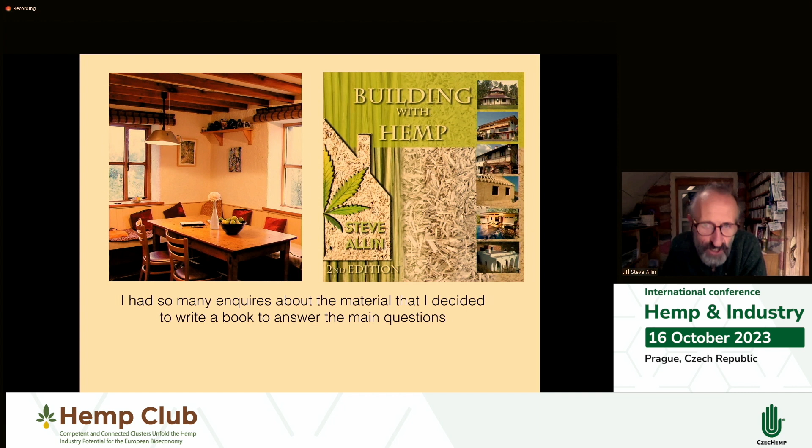This also led on to me being in contact with other groups who were interested in promoting alternative ideas, and a lot of those people were connected to permaculture.

Permaculture was an idea that originated after the first oil problem around 1972. Funny how a lot of things all started around that time. That was when we had the first oil crisis, and when it had been predicted that the US would reach its peak of oil production, something the oil industry was absolutely horrified by. They tried to discredit the scientist who came up with those ideas, a guy called King Hubbert, and dismiss the whole concept as ridiculous.

However, some years later, a group of oil geologists from around the world attempted to do the same calculation for the whole planet rather than just the American industry. They realized that around the middle of the 2000s we would be heading into a similar situation. This inspired some students studying permaculture on a course in Kinsale, in County Cork in southwest Ireland, the very first accredited permaculture course, to invite me to teach them about hemp building. They then realized, having amassed all this information about the impending doom of oil becoming more expensive, and climate change as a result of oil use, that this was going to have dramatic implications for humanity.

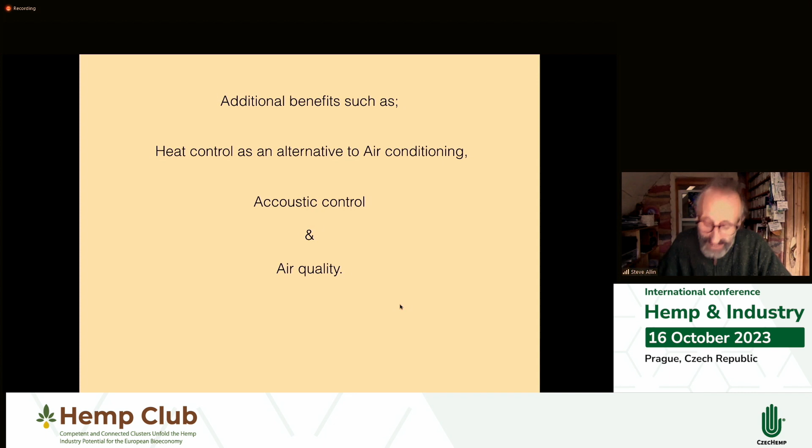Hello, everyone. My name is Paolo Ronchetti. I've been involved with hemp building since 2006, first as a postgraduate student and a researcher, and then as an entrepreneur, and now as a manager.

In 2011, I started up a company called Equilibrium, with the aim of introducing hempcrete construction in Italy. At the time, we had no hemp building in Italy. And since the beginning, my aim was to bring hempcrete to the industrial scale, because according to me, that was the only way to bring this technology to the stage that it deserves to be.

In 2018, we joined Senini, which is an industrial player in the north of Italy. It is a large company with 5 plants. One of them is totally dedicated to hempcrete construction. We didn't invest into a new plant; we actually retrofitted an existing plant for making concrete blocks into a hempcrete blocks plant. The company's core business is concrete products, mainly floors and blocks.

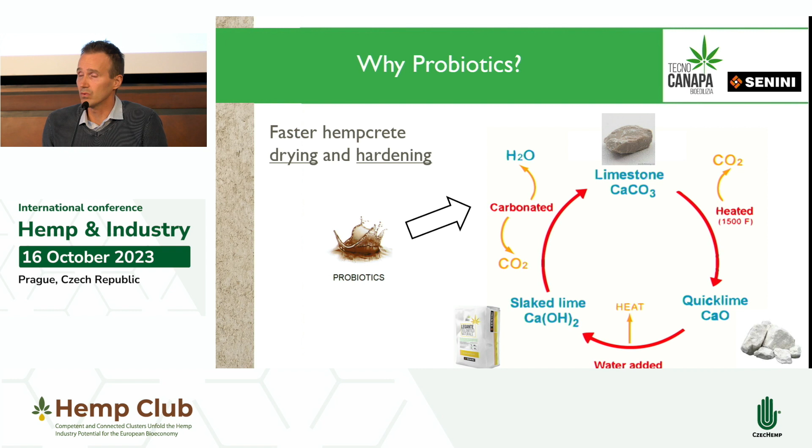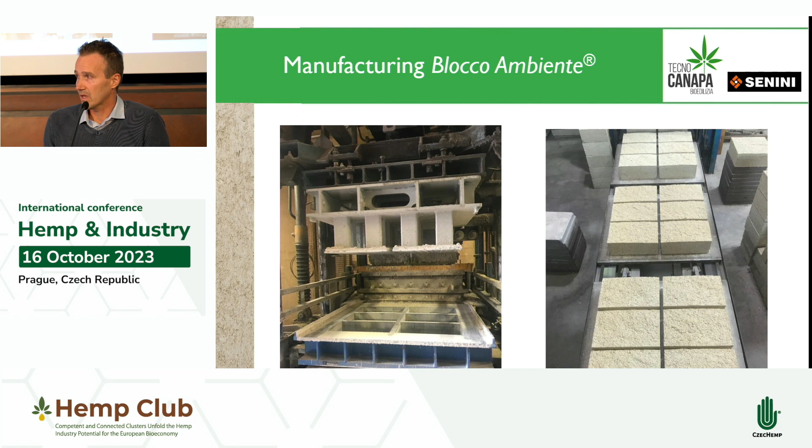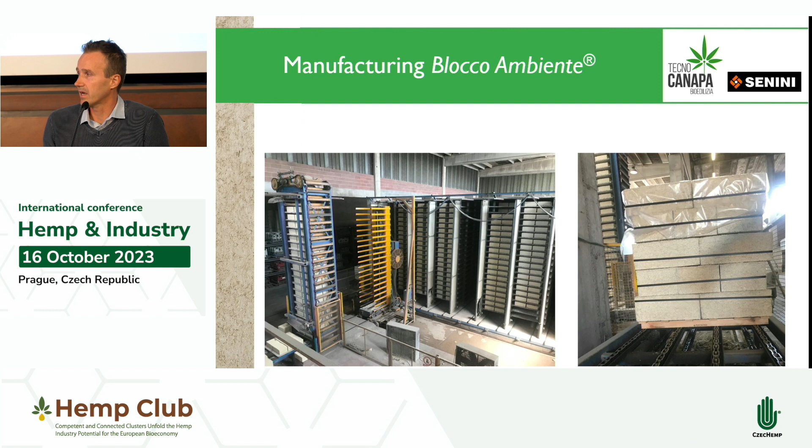So with little investments, we were able to start up a new production line. As you can see here, it's a very low energy production. So no hot air, no ovens, just after press molding the blocks, they stay there in the air and they get hard, and then they get palletized and then stored outside and then sold.

With the same plant, we also manufacture low-density hempcrete, which is sold ready to be used in big bags, 1 or 2 cubic meters, and it is used for insulating roof and floors.

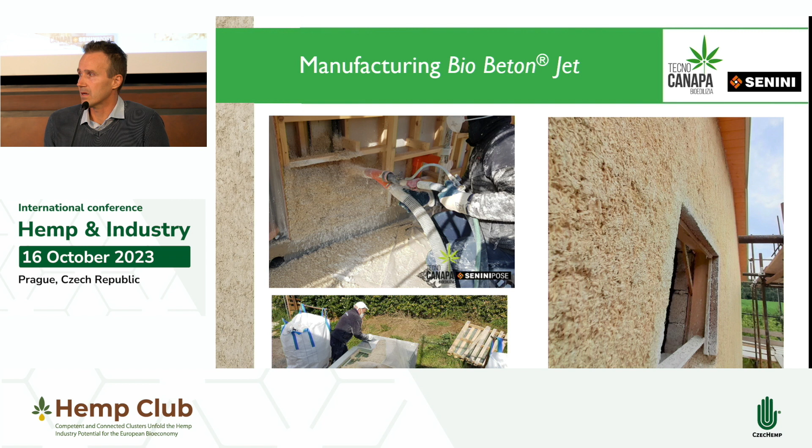We also decided to invest in the spray machine application, which is an alternative to construction with the blocks, and it really speeds up the construction cycle, because with this machine, which is our own machine, a new project we came up with, basically you can reach up to 30 cubic meters per day of applied materials.

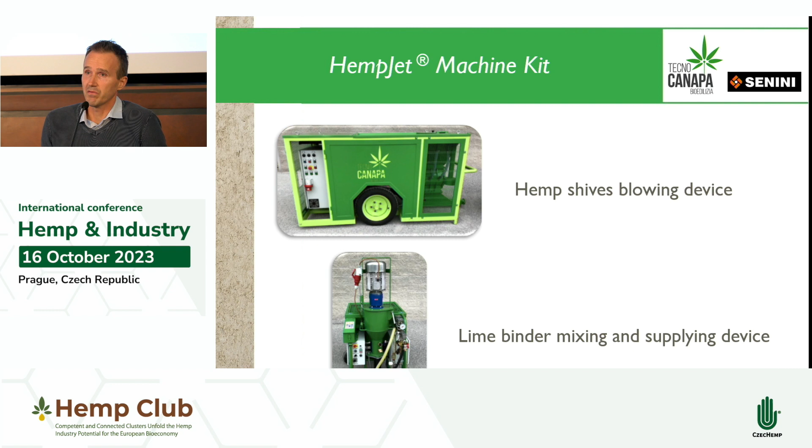We update it every 3 months, and we are now over 1,000 tons of CO2, which is transformed into carbon credits. Just to give you an idea, last year in 2022, we generated almost 300 verified emission credits, which are sold on the voluntary market. I expect this figure to grow over time, because we are just at the beginning. Since 2011, we've done hundreds of building sites all over Italy, as well as abroad.

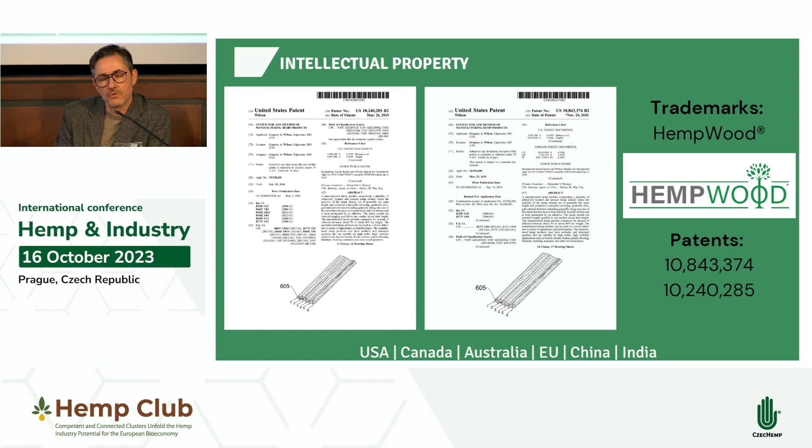It's a patented technology. We have two main patents registered in several countries. One is a cold press technology, on the left-hand side, meaning we compress blocks. On the right-hand side is a hot press technology, meaning we apply heat during compression to make, for example, large solid panels.

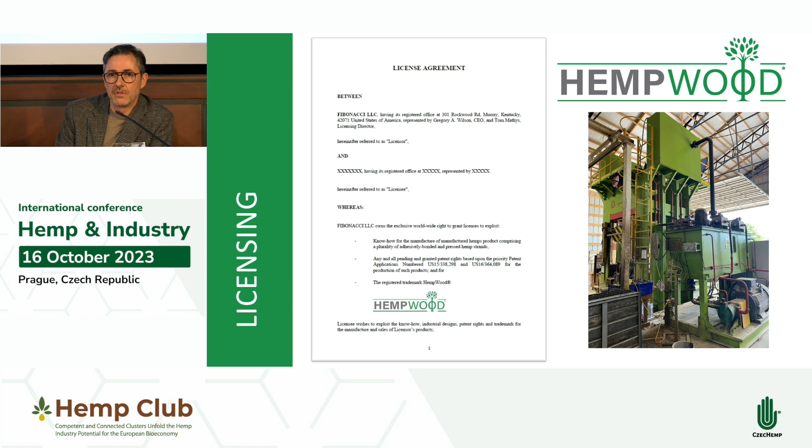As I said, for us it's really important that hempwood is produced by as many companies as possible worldwide, instead of setting up factories ourselves worldwide, which is an impossible task to do. We have companies requesting from each continent worldwide to use their own facilities. They want to use locally grown hemp, convert it in a factory they would build themselves using local people, and sell it locally. So this is a project we very much support, and that's why we have this kind of license agreement policy in place, a license program that allows this.

What are the main goals? Nothing surprising probably for this audience. Of course, fight deforestation as much as we can. You all know how fast hemp can grow compared to normal trees, so it's a no-brainer basically to use hemp if we can use a complete stalk.

It is also proven in different studies that if we use hemp as a raw material, for example as flooring in this room, instead of vinyl flooring or plastic flooring or any other flooring that has more harmful or chemical materials in it, that it has an impact on the cognitive capabilities of people. For example, we concluded a very big contract with American schools. These schools opted for our flooring, not just because it's eco-friendly and the right thing to do, but because it has been proven scientifically that students have a 10% better cognitive performance if they are in a room with no harmful chemicals.

That's why we also call our floor healthy flooring. We do not use any added formaldehyde in our production. Even the bonding agent is natural-based, a bio-based glue. It would be easy to use formaldehyde, but we don't do it. We've chosen the difficult route of figuring out how to use natural components in our glue. We mainly use soy flour as the ingredient to make the bonding happen.

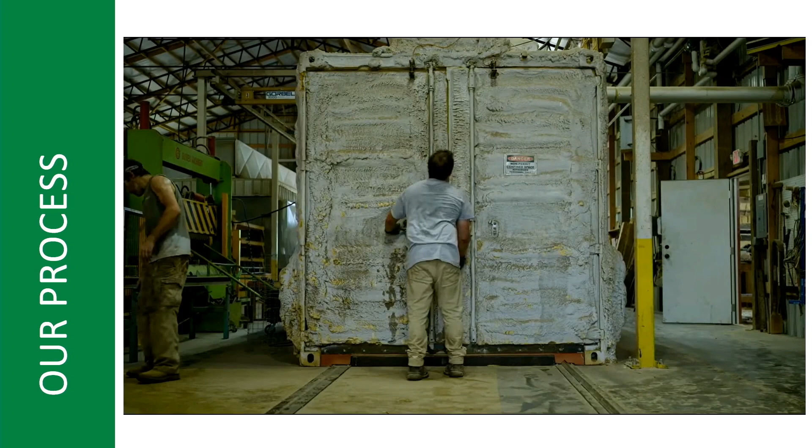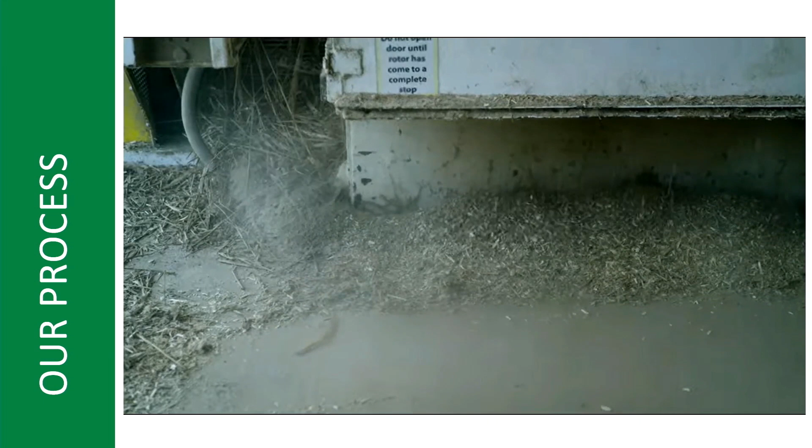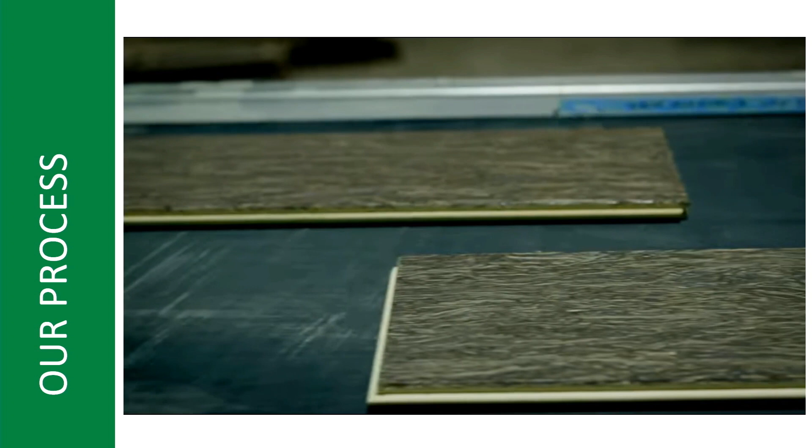Dried stalks are separated, crushed, and submerged in a plant-based, no-added formaldehyde resin. A drying kiln circulates air to cure the resin to the stalks. The hemp is then pressed into blocks and baked in the oven. Blocks are then carefully cut to order. The zero waste system uses leftover product to power the on-site bioburner. At the milling factory, Hempwood organic flooring comes together. Each piece is then boxed by hand and shipped to customers around the world. See how Hempwood can improve your healthy living space. Visit hempwood.com today.

Okay, we're back. So in the video you have seen that our factory is not made in the most sophisticated way. Maciej Kowalski, you have visited our factory, and I want to join your point that you don't have to invent all the machines or buy all the new machinery. Actually, many of the machines we have in our factory come from the tobacco industry.

For example, our drying kilns and some of our drying racks come from the tobacco industry, because that was just available in the area. We used a sea container and converted it into something for drying and also as a baking oven. So we tried to use all kinds of cheap materials and make the best out of it, because sometimes the machines just don't exist for hemp application. You have to figure it out yourself, because having it made by companies will cost a fortune and a lot of time.

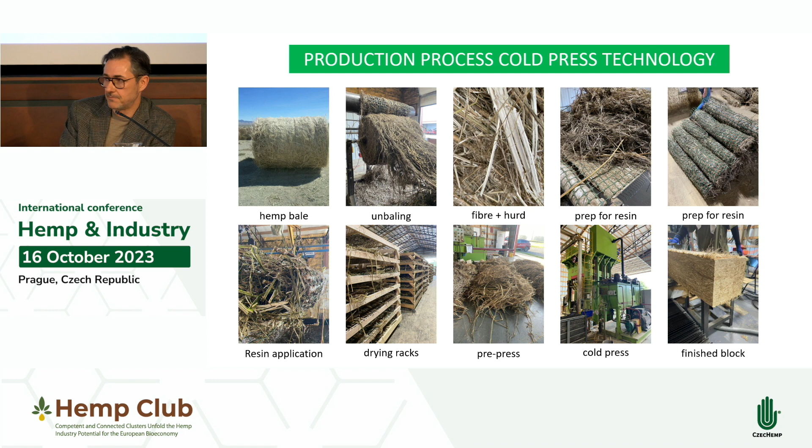So Hempwood is actually the block, as you can see on the left-hand side. Now on the right-hand side, you see two different visuals: a more linear visual and a more random visual.

Each of the two visuals is always present in a Hempwood block. The only thing we have to do is turn the block 90 degrees on its side and cut it in the other direction. The linear visual that you see on the left-hand side, you will probably also see a piece of flooring go around in the public.

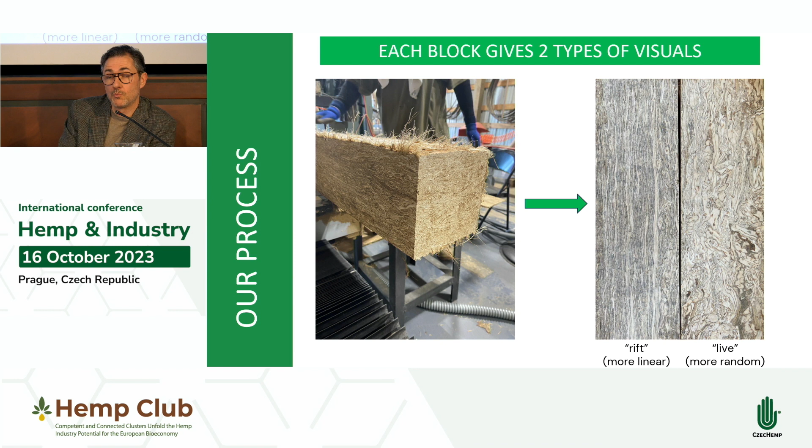We use this linear visual for our flooring, for large panels, because it has a more straight visual, the visual that coincides more with normal parquet flooring. Whereas on the right-hand side, the random visual is something that is more used for designer objects.

We're also very proud that we have had a life cycle assessment that tells that our hempwood flooring is carbon negative. Actually, it's the only carbon negative wood flooring in the United States. It is a great achievement.

Of course, we have 85% of the product that is hemp, sequestering about 1.62 tons of CO2 per ton of hemp. So this is already a very important component of it. But the reason why we have achieved this carbon negative status is also because 99.5% of our electricity comes from hydropower. This is also a very important part of this achievement.

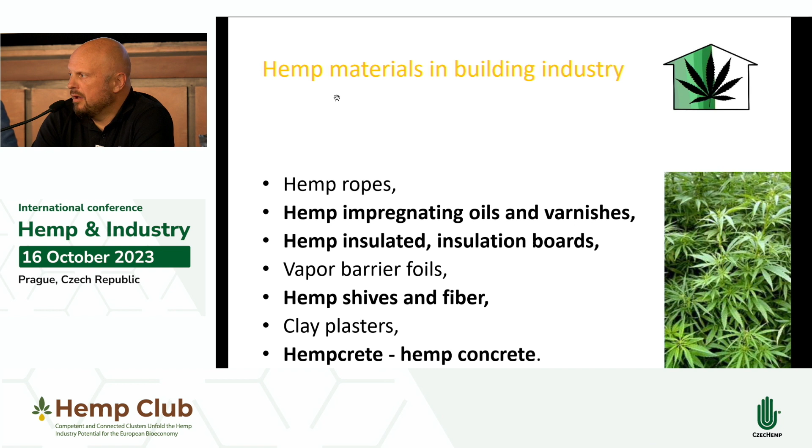Sorry for this. My name is Patrik Majringer, and I started with natural material in 2007, mainly in Czech and Slovak Republic, Czechoslovakia. During the time, we started selling material mainly from hemp.

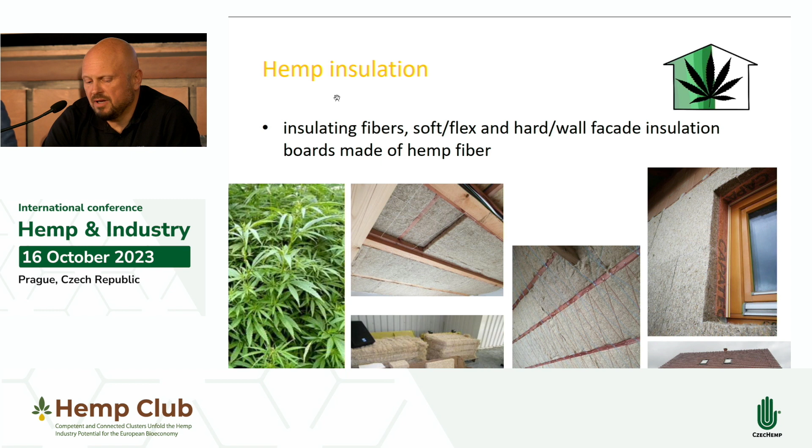At first it was colors, varnishes, oil for wood, from hemp ropes, from fibers. Second was hemp isolation, because in Czech Republic, in Moravia, there was a big company who produced hemp isolation, and we sold their products. We used it in roofs and others, but I think Francesco will tell you more about this isolation.

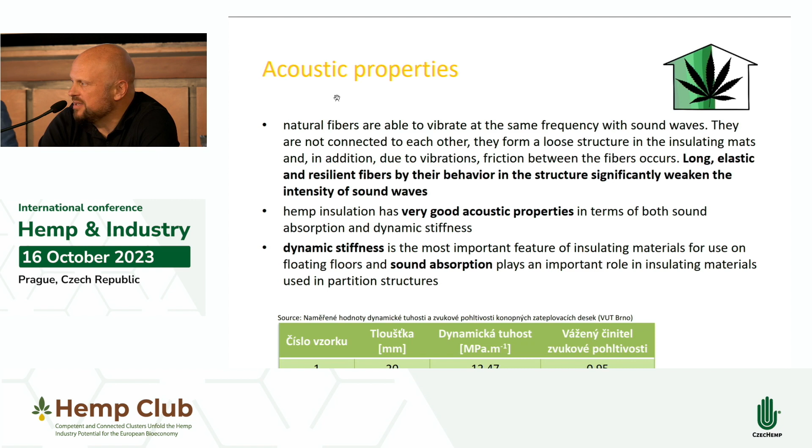I can show you only some pictures, and there is some information about this, but some pictures from our work. We use it for floors, for walls, for roofs, and the wall desk for contact isolation for brick houses.

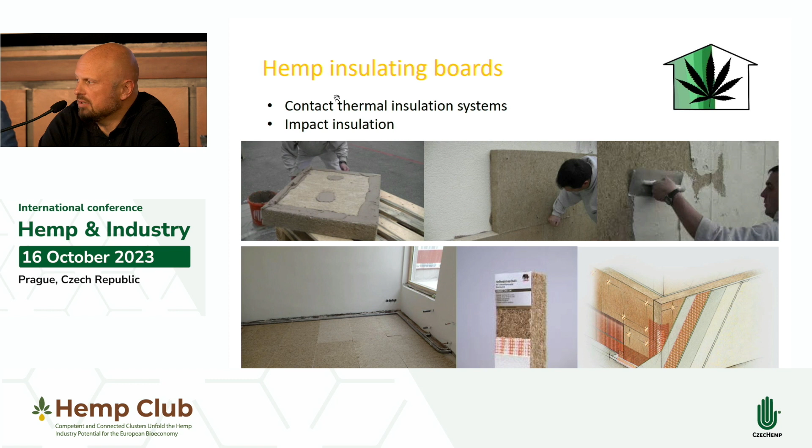We are there for hempcrete because it is a very interesting process, and my colleagues talk about it. There is some structure of hemp shives, and it is why this is isolation. When you mix the hemp shives with lime binder and water, you can prepare isolation for roof, wall isolation, floor isolation, and you can prepare material for plasters.

There is some construction. This is from our first visit in France, where we were with my colleagues.

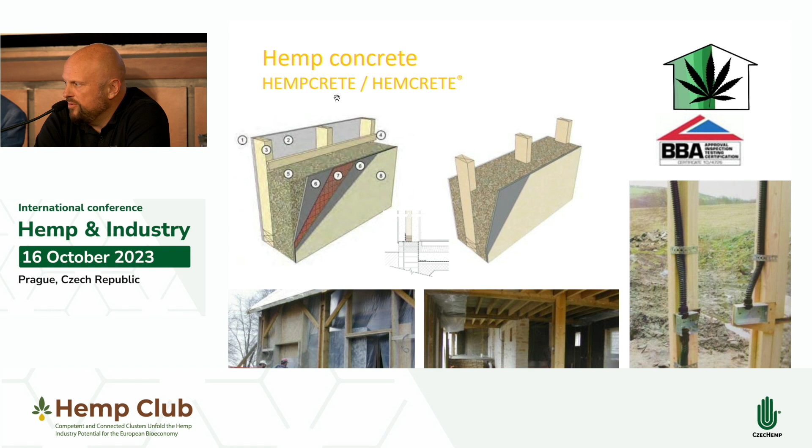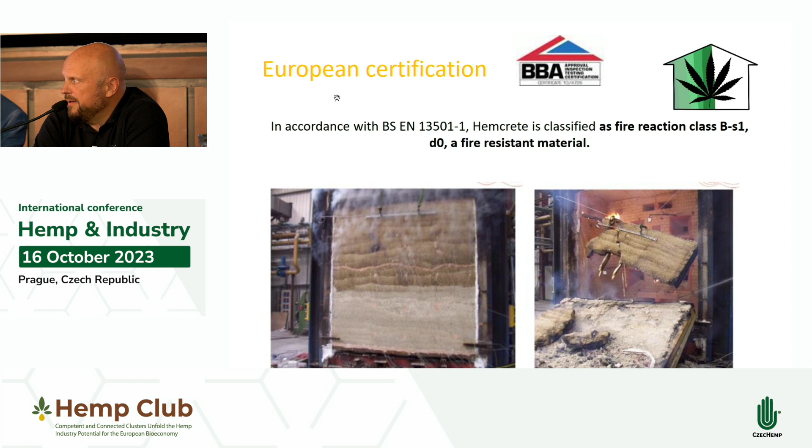There is some test for fire resistance, this is from Great Britain. 72 minutes after this construction, the material was okay, and it is fire resistant for everything. But very important information are the isolation parameters.

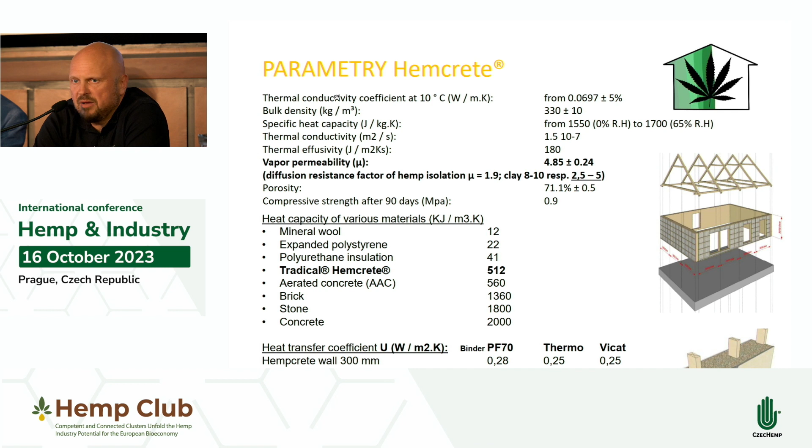Diffusivity, open material, good isolation for thermal conductivity, and a very important thing is temperature accumulation for hempcrete.

But what is the question for this time is CO2. CO2, it is like a mantra. Everybody talking, all European Union, all world talking about CO2. No, not all world, only the West.

When I start with this material, I start with a little project, mainly reconstruction, repairing old houses, preparing first floor, plasters, and the other.

But recently we started using hemp lime plasters, but also clay hemp plasters together in old houses, and we built clay mixed with hemp shives. Very nice design.

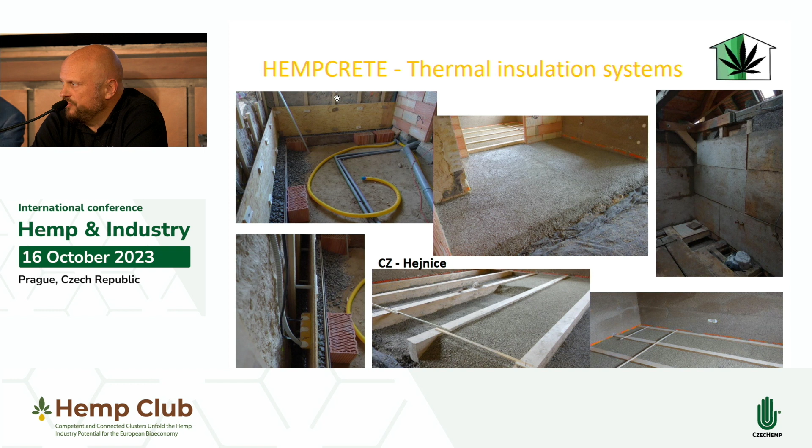It is our project from North Bohemia, Hejnice, hemp floors.

Other project, two houses, Uholičky and Vraž u Berouna. It was isolation from outside. We used hempcrete there, but I can recommend this process for inside isolation instead. It is really better.

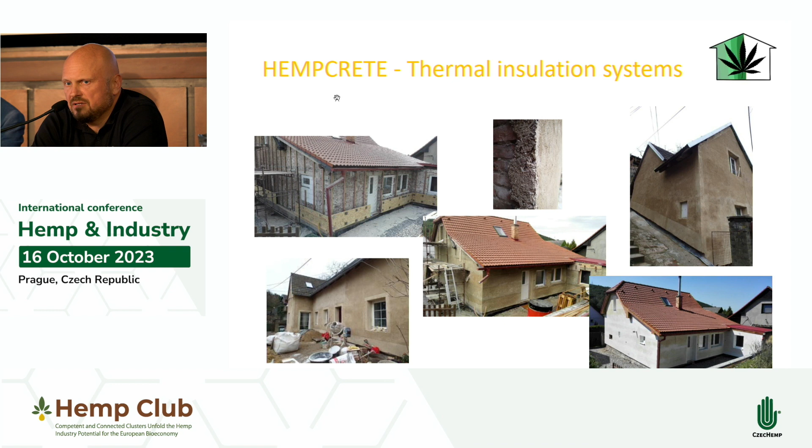near Praha, there we use hemp floor and a little house under the new cottage from straw panels.

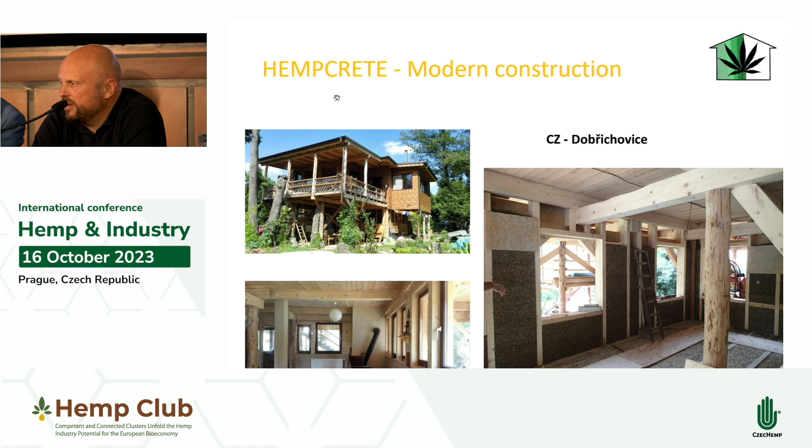Family house in Jamné u Tišnova in Moravia. It is a modern house. There we use hemp isolation in the roof, but all walls in this house are made from hempcrete.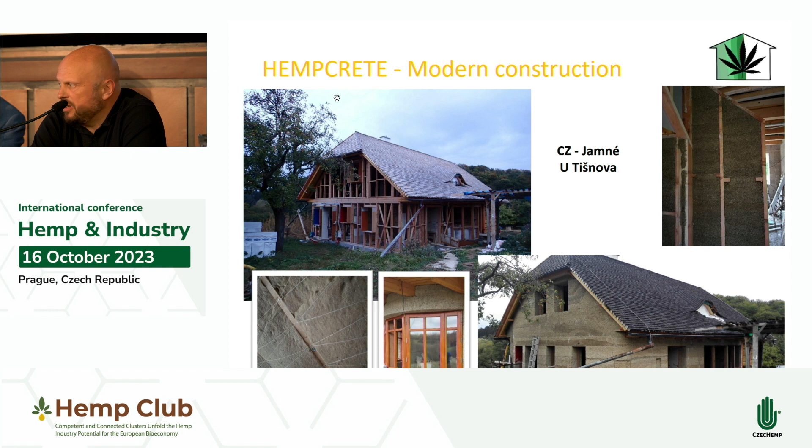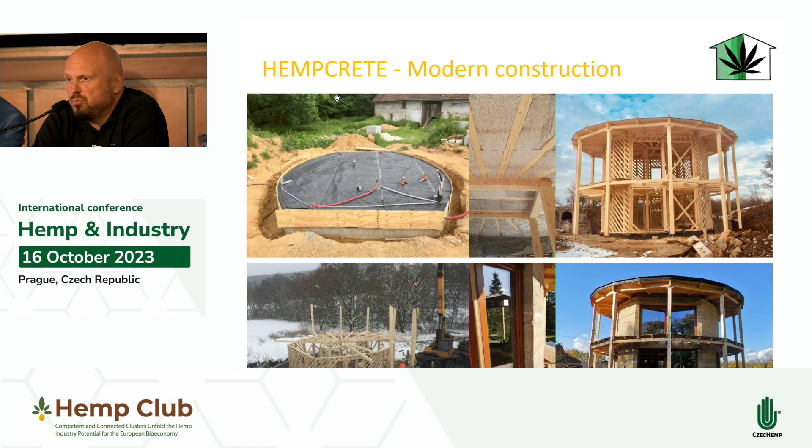It is a very nice house, and there we held a lot of workshops with clients and potential clients. We made it mainly by putting hempcrete into the shuttering. Yes, it was our first work with this mixing machine.

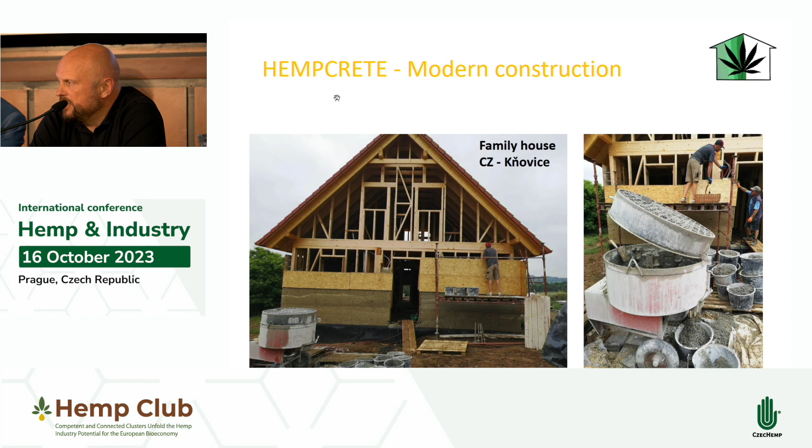It is a family house in Kňovice, South Bohemia. There are some details of how we used it, and we put the hempcrete into the shuttering. There are some plasters.

It is a very nice project because the owner of this house brought this material to the Czech Republic. He showed it before 2000 on TV, but nobody knew about it. He is my friend, and I sell him some material after this, because he has great knowledge and he taught me how to do it.

Inside, in the floor, is hempcrete too, hempcrete isolation, hemp lime isolation.

I can remember a very good guy, Wolf Jordan. He taught me too. He was a Belgian guy, and he left us, I think, 3-4 weeks ago. Sorry, but Wolf was an expert for lime and for using this lime with hempcrete, with hemp.

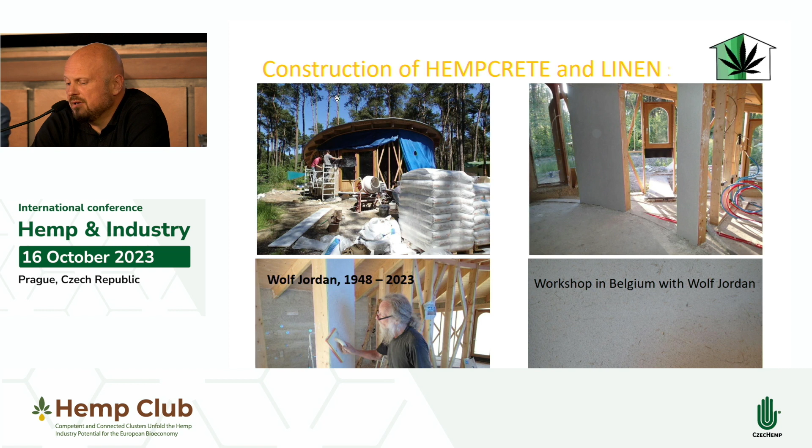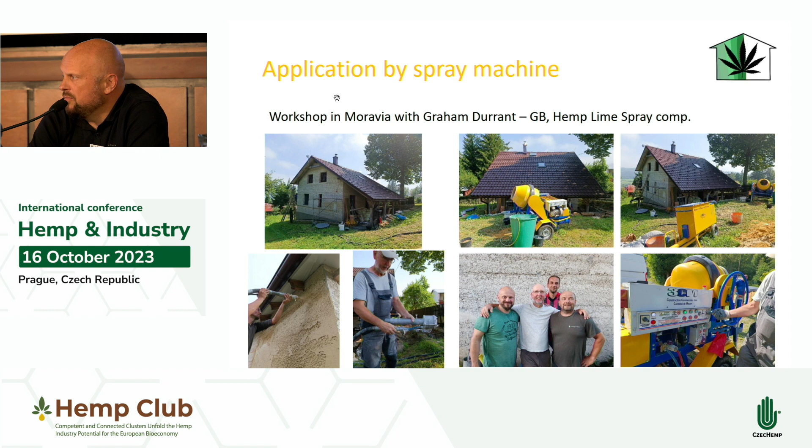There we teach how to do this with a spraying machine. Graham Durrant from Great Britain was there and taught us how to do it.

But now we have a new project in North Bohemia with company ekobuild, and this is a natural park, farm of elements, or garden of elements, and it is in Lánov near Vrchlabí.

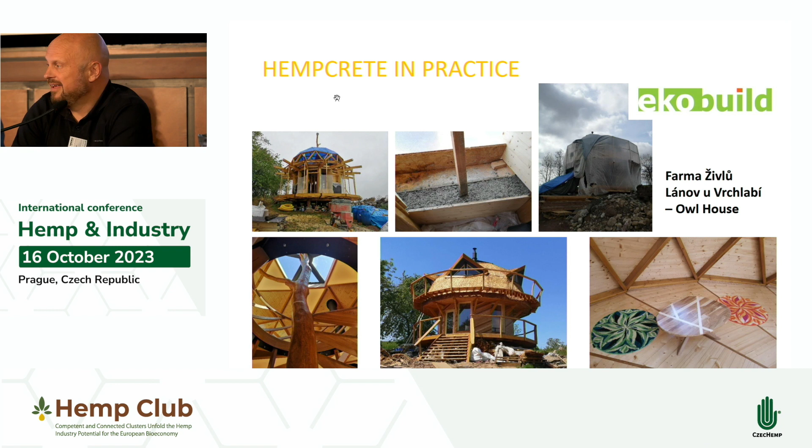And there we built a normal roundhouse from hempcrete. You can see here it's made from hempcrete, and on top are everywhere hemp oil lazures, varnishes, hemp oil for wood.

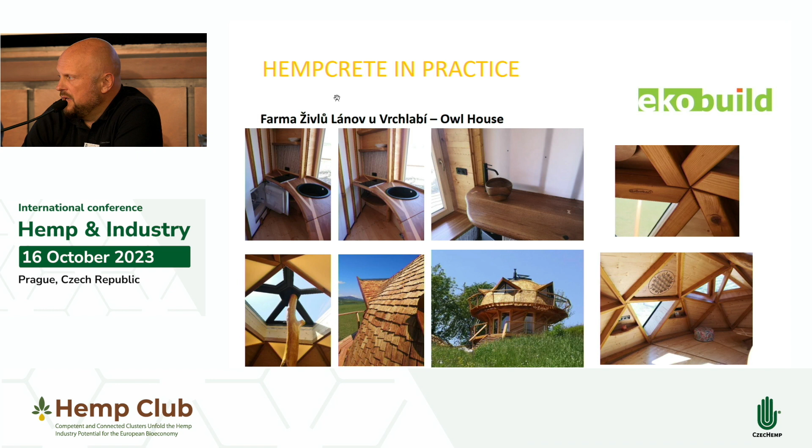Inside is hempcrete too, and after this we started a new project with hempcrete blocks. We didn't know how to do it, had a lot of information from the internet, but we cooperated with a project and architect office and prepared these pieces for wooden construction.

And one of these is a roundhouse, because this is two houses: in one there are 7 rooms, and the second house is for public presentation, something like a theater.

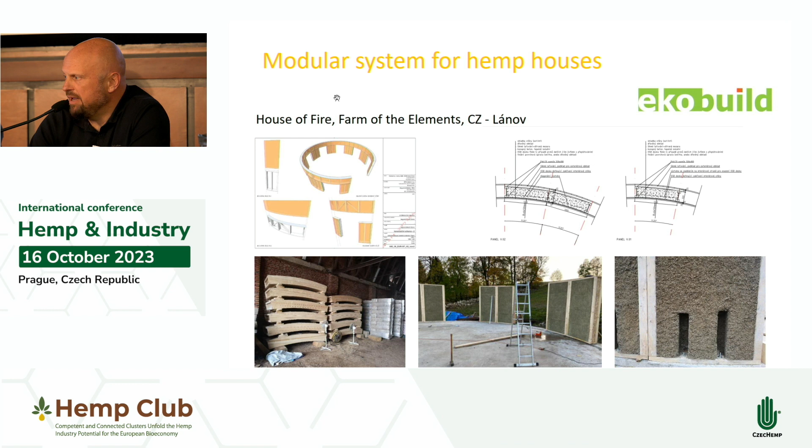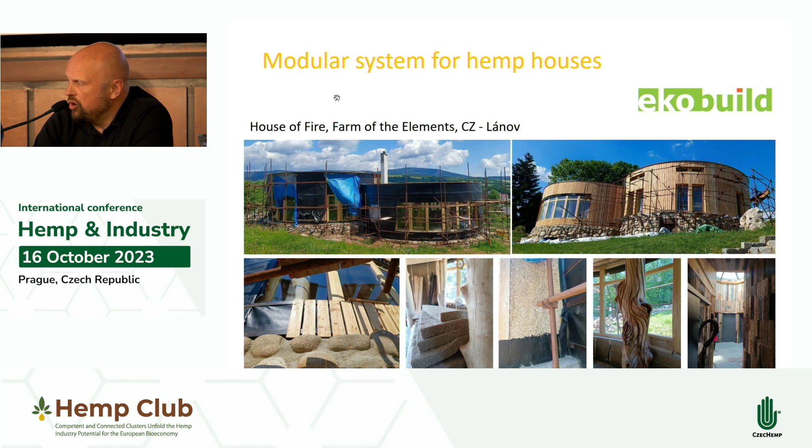And we built one roundhouse during 8 hours with these pieces. It was very interesting because after drying we can prepare a house very quickly. And this is after. Later on top is hemp oil, hemp varnishes, everything.

And after this experience we started a new project, house Mila, as we named it, made from prefabricated pieces, and now we are preparing 9 houses near Lánov in North Bohemia as a development project.

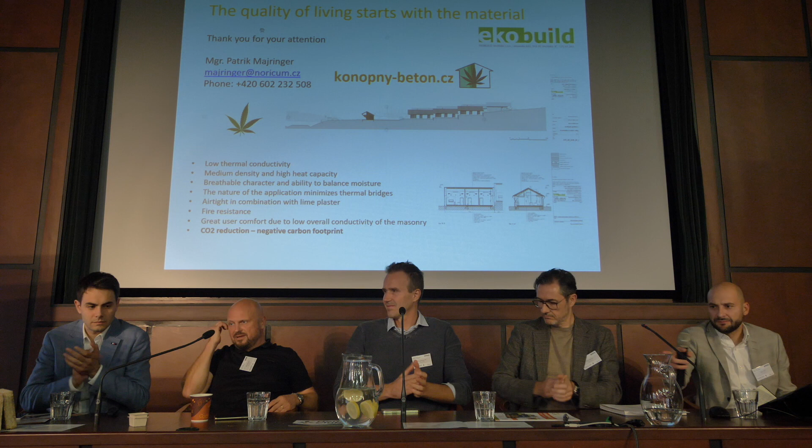I'll be brief in this introduction. My name is Francesco Faralli, and I work for Cormatex. We are machinery producers based in Italy. Nowadays it's the third generation running the company that was founded in 1938. The company initially started in two sectors, wool and spinning, from the very beginning, but around the 60s the company decided to move also into the non-woven business.

Around 2006, 2007, so almost 20 years ago, the company developed these two airlay machines with the idea to process not just virgin fiber or virgin material, but mainly to process waste. So the machine has not been specifically designed for hemp. The idea behind the concept was to use, as you can see from the picture, even mattresses, paper, carpets, any kind of waste that can be grinded to form a sort of mat.

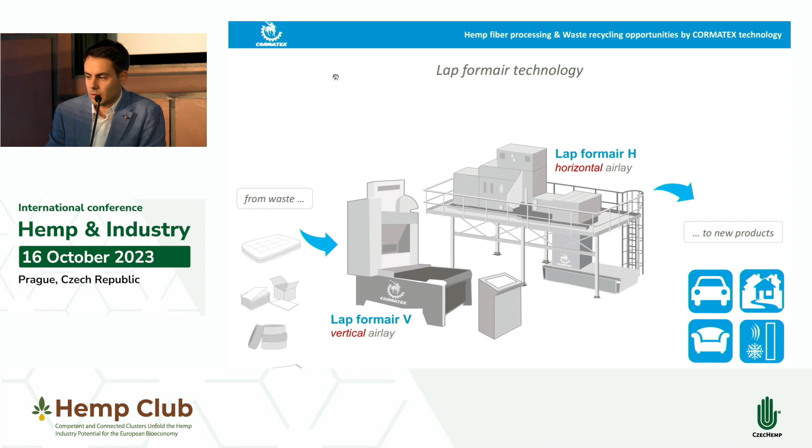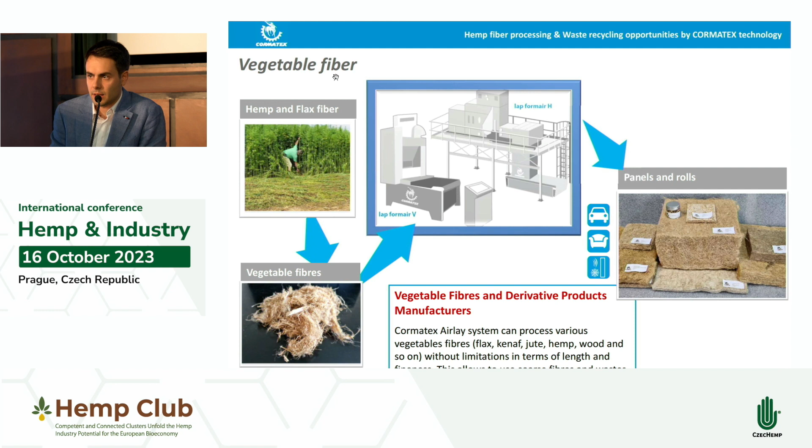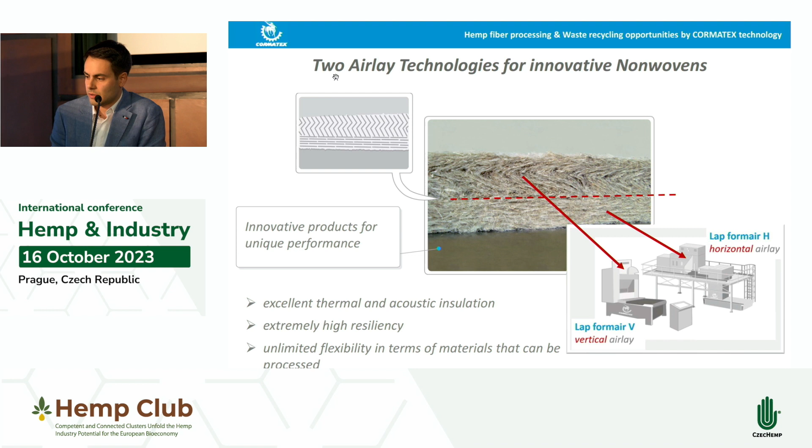I will not speak about all the products that can be processed through this machine, but I will just go directly to hemp. As you can see here, we can basically process any kind of vegetable fiber. Here you have an idea of the fiber orientation. We can also merge these two lines to have a product with both kinds of fiber orientation, in order to have the advantages of both, vertical and horizontal.

Then we have the airlay, the forming machine. We can set different weights of the products. After the airlay, we can have a needle-punched product, so 100% hemp fiber, or a thermobonded product. In that case, at the beginning of the line, in one of the bale openers, we add thermoplastic fiber, a low melting fiber that can be synthetic or natural. Then the oven will basically melt this fiber to create cohesion among the fibers.

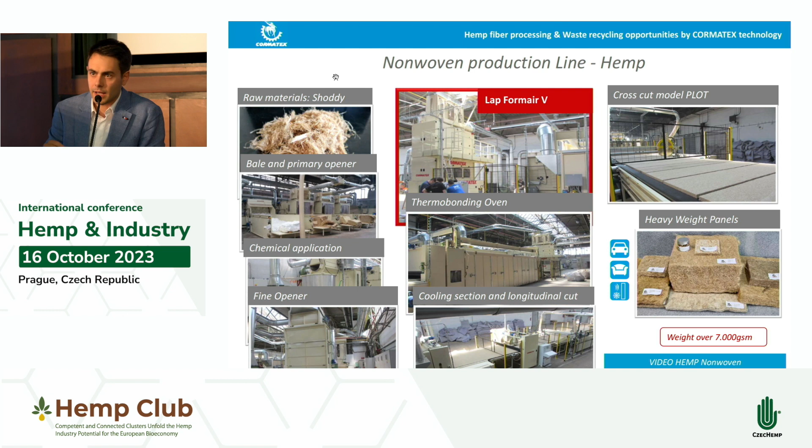The main advantage or innovation in this kind of technology is that we can process not just the fiber, but even the hemp shives or hurds, the wooden parts, to create these kinds of panels, or even the fiber mixed with this wooden part. From the machine process standpoint, there are no issues in mixing different kinds of fiber and hurds.

This is more or less how the airlay looks like. We have a feed condenser where we are blowing the fiber or any kind of input material. Then it goes through a volumetric feeder that forms a first mat, where we have a scale checking the weight of the product. Then there is the vertical forming section of the machine, where we have 8 distributing rollers that are aerodynamically forming the mat. At the bottom of the forming machine, we have suction fans, so the machine is basically working a little bit in negative pressure.

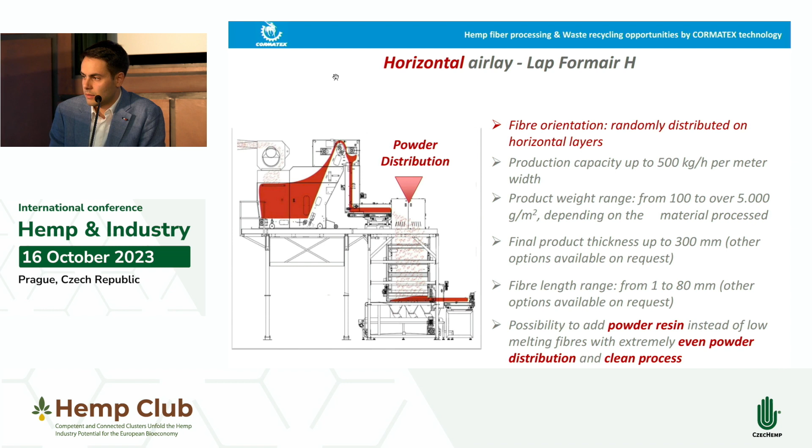At the outlet of the machine, we have another scale to check that the weight is on target. We can add any kind of powder or resin inside our product, in a percentage up to even 60 or 70%. This can be a flame retardant or any kind of resin. It can even be the binder, if we don't want to use the thermoplastic fiber at the beginning of the line, or any kind of resin to bind the material.

These are some possible applications: building insulation, home furnishing, and another interesting sector we've seen nowadays is food packaging or pharmaceutical packaging, where we are trying to replace plastic with paper, but also natural fiber like hemp.

And we do have a pilot line in our factory where the customer can come in with their fiber, so we can test their fiber with our machine to make a small production, let's say. Thank you.

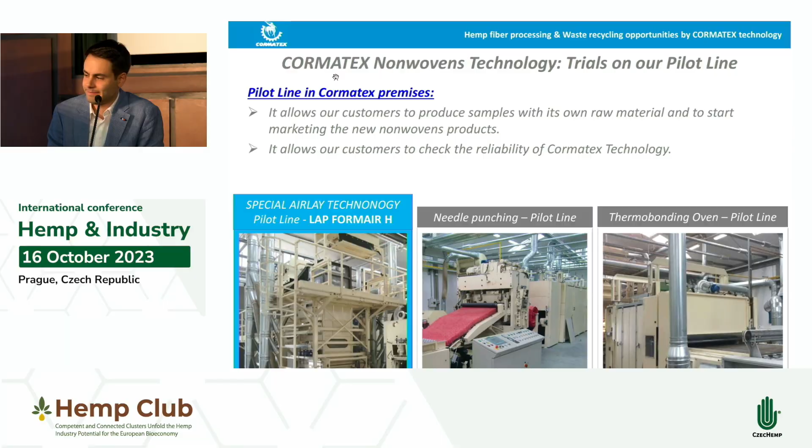Thank you for your presentation. Now, as I said from the very beginning, I'm not from the hemp industry. I work as an ecotech person within the state, so I'm from outside. So I might have some naive questions. Let's play this game, right?

I've heard here quite many times today that it's important that the hemp industry goes together, but to me it seems that it's a highly competitive industry. Who is your client? How do you feel from the market at the moment? Are you satisfied with the demand on the market, or what are the biggest blocks within the strategy to go to market? Can we open up this question about the market? Is the market ready for you?

Can I start? No, this market is growing. I see it because for a long time in Czech Republic it is growing up, and during COVID it was like a rocket. But now we can feel some problems in all economics around the world, and we feel it. That's right. I don't know, maybe my colleagues will tell you something different, but I am afraid that the European Union doesn't support these materials - they're pushing CO2 reduction, but doing nothing for hemp.